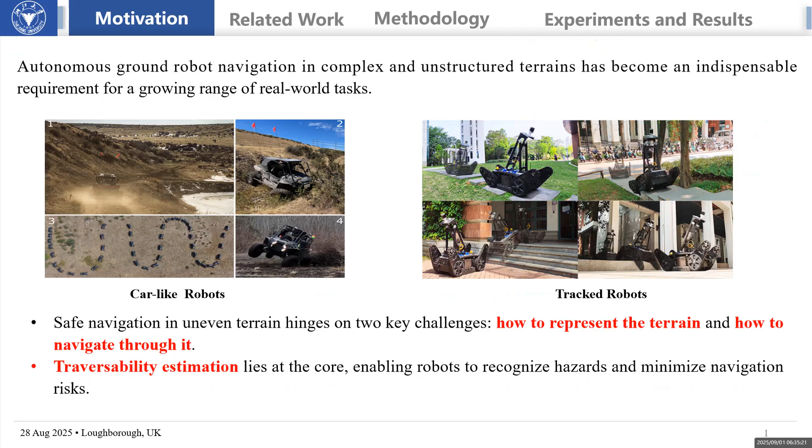Now let's talk about the related works. Recent approaches to safe navigation on uneven terrain can be broadly categorized into two directions: GP-based methods and control barrier function-based methods. GP-based methods can smooth representations of terrain, but they are heavier and don't recognize and respond to highly dynamic obstacles.

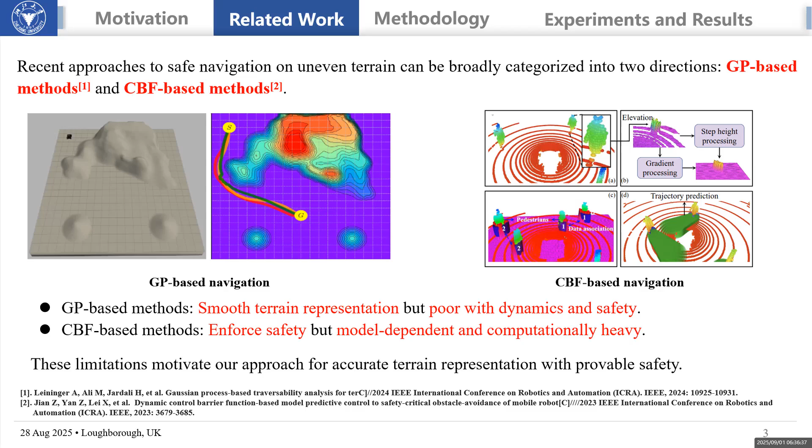Control barrier function-based methods can ensure safety, but they are model dependent and don't describe the obstacles continuously. These two limitations motivate our methods. We can solve these two problems, providing not only safety but also continuity about the obstacles.

We built a GP over the terrain to produce a high-resolution traversability map and uncertainty fields. And from GP gradients, we built stochastic control barrier functions with ellipsoid safety certificates inflated by the posterior

covariance. These certificates are embedded as constraints in the convex model predictive control, enabling real-time safe control while providing forward invariance.

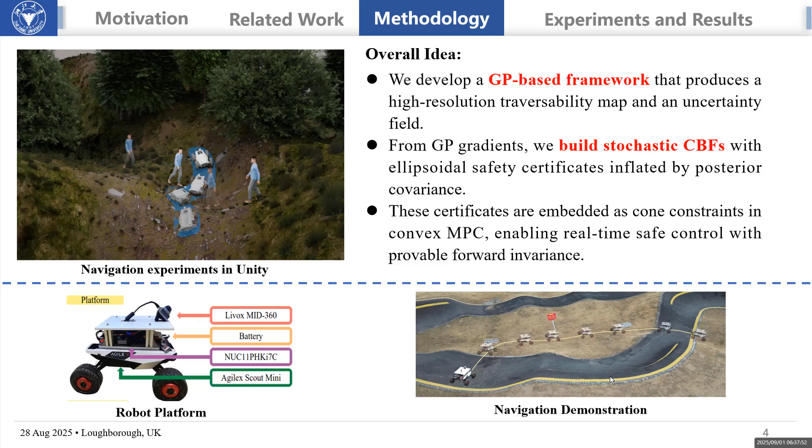This picture is our simulation navigation experiments in Unity, and this is our real-world experiments. This is our hardware, and this is autonomous navigation in uneven terrain with our method.

This is our framework overview. You can see our framework integrates lidar-based localization, GP terrain mapping, control barrier function safety certification, and model predictive control. This unified pipeline enables the robot to generate uncertainty-aware traversability maps and to guarantee safe and fast navigation in uneven terrain.

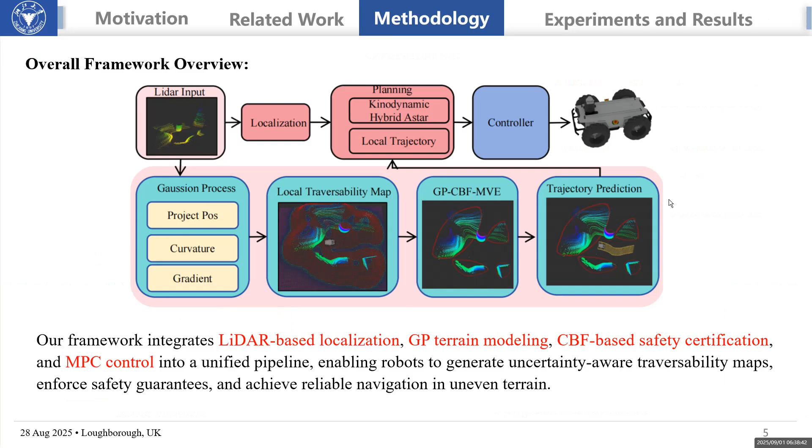This is our methodology. We used a sparse Gaussian process with an RBF kernel. The input is the local point clouds and height gradients, and the output is the traversability mean and variance. The gradient fields reflect the slope and local changes, while the variance quantifies how uncertain we are at each location.

Now let's bring the uncertainty into safety. We encode safety with a control barrier function. When traversability is low or uncertainty is high, we can build an uncertainty margin autonomously, as safety buffers where observations are sparse and the terrain changes rapidly.

But maybe you will ask, how do we get computable geometry? We can approximate risk sets with a minimum volume enclosing ellipsoid like this. We build the obstacles and regions for certification as ellipsoids; the minimized ellipsoids represent our obstacles, and we inflate each ellipsoid by the local GP variance, and finally we do the Taylor expansion like this.

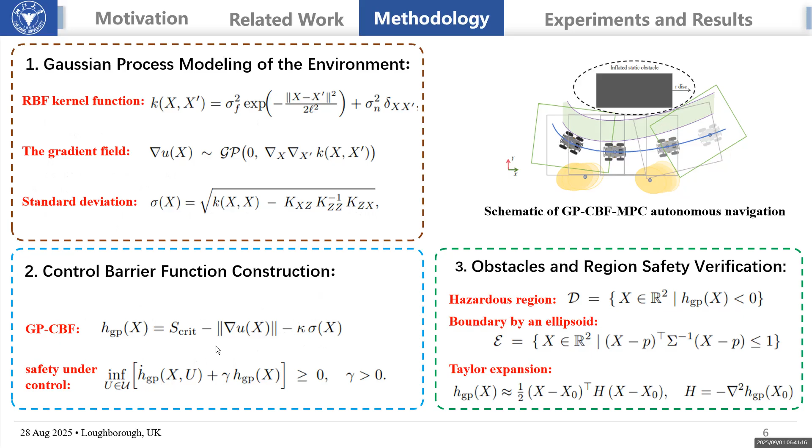This picture shows our GP-CBF-MPC method in autonomous navigation with dynamic obstacles. This is the GP control barrier function we build with the Gaussian process. This is the RBF kernel, this is the gradient field, and this is the standard deviation. We can guarantee safety under the control.

Now let's go to the MPC formulation and the closed-loop safety.

And to generate dynamic, feasible, and collision-free trajectories, we embed the ellipsoidal barrier functions into MPC methods, and at each time step, the controller can be written like this, with the discrete dynamics and the barrier constraint like this.

Finally, we can close the loop in the MPC algorithm. Each state can obey these methods. And in the right picture, it is our whole algorithm. You can see how our algorithm guarantees the control barrier function.

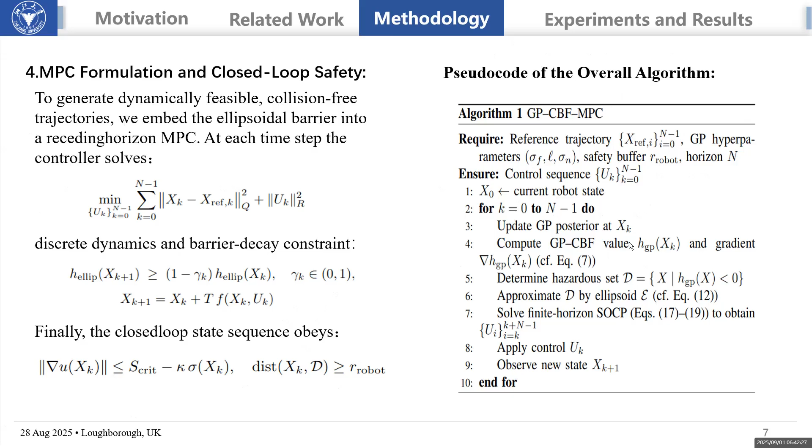Now let's talk about the experiments and the results. We do our experiments in the Gazebo simulation, and we validate our GP-CBF MPC framework through extensive tests on unstructured, uneven terrain, and a lot of other types of terrains.

And we compare our methods with two baselines: the sparse Gaussian process-based terrain assessment pipeline and the classical dynamic control barrier function MPC methods, across diverse terrains, in control performance and navigation reliability. You can see this picture, and our methods are B and E.

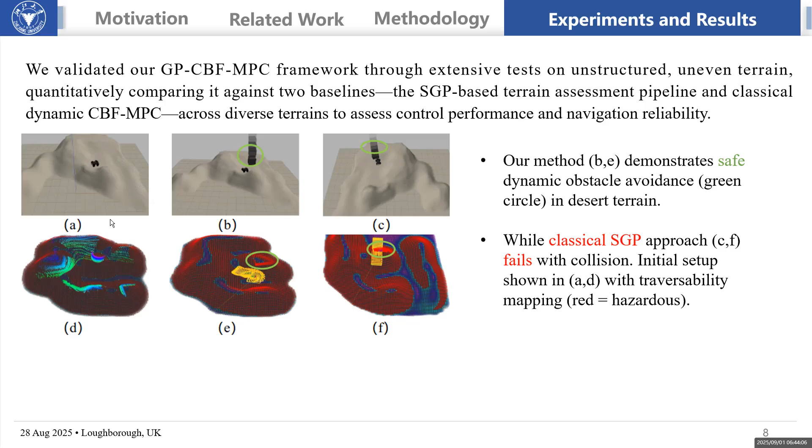You can see we demonstrate our methods in this uneven terrain with dynamic obstacle avoidance, and the green circle shows our methods can be collision-free in this occasion, and the yellow one is a safety area, but the classical sparse Gaussian approach, like C and F, fails with the dynamic obstacles. You can see it crash at this place. A and D show the original uneven terrain, and the LiDAR-based local map.

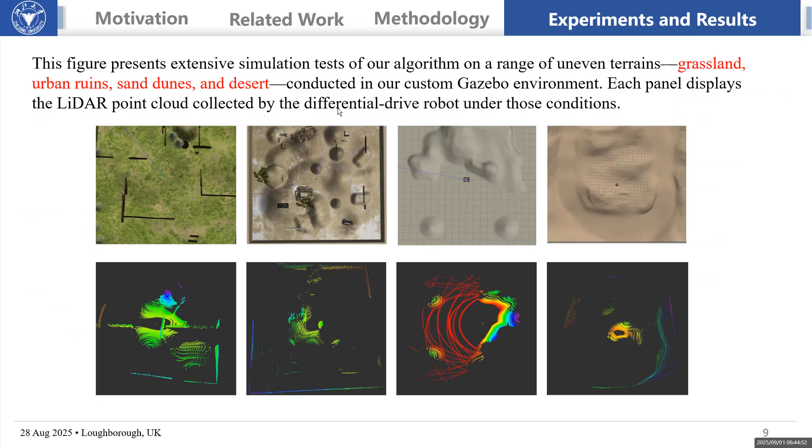And this slide shows the four types of terrains in our experiment in Gazebo. This is a grassland, this is the urban ruins, this is the sand dunes, and this is the desert. We show our algorithm in these four high-resolution simulated environments. And the pictures below display the LiDAR point clouds collected by the differential drive robots under those conditions.

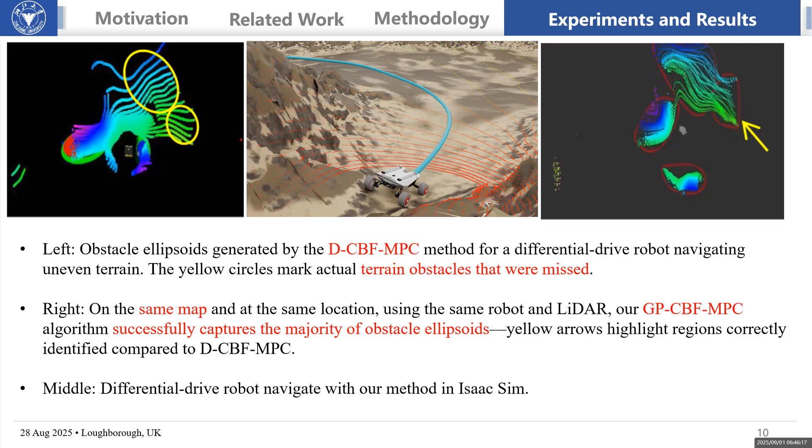This is all our experiments. And in summary, we proposed ellipsoid safety certificates by the Gaussian process uncertainty, with a high-resolution map and a high-computing MPC method, and it can solve in real time and provide safe navigation on challenging terrain.

In the future, I hope our methods can be implemented in Ackermann cars or omnidirectional dynamic models, and I try to implement my methods in more and more real-world experiments, and in the future consider SE(3) dynamic models or connect with learning-based methods.

And in this work, I didn't focus on the trajectory optimization. Maybe the trajectory isn't smooth. So in the future, I hope we can change this by optimization methods. That's all.